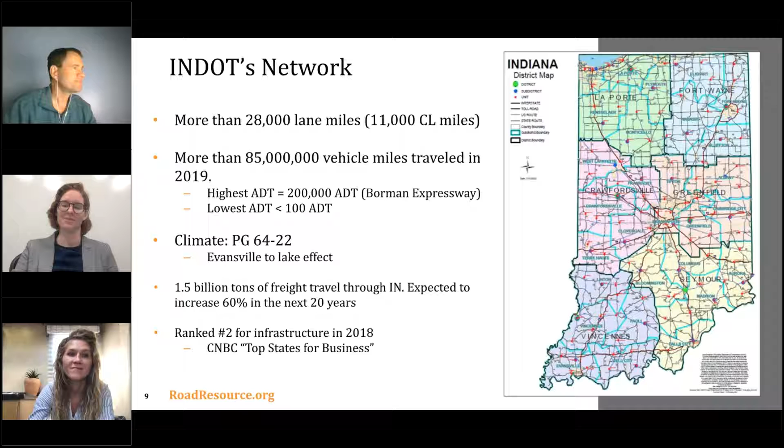So we had to go all the way back to 2005 to make this story make sense. We wanted to tell the story through our Pavement Preservation Initiative and the economic downturn of 2009. But in order to really tell that story, we had to go back to 2005, where we had no formal preservation program at all. In fact, 2004-05 was when pavement preservation as a term was just becoming popular. You had the National Center for Pavement Preservation, I think, formed around that time.

Our budget was $300 million a year for pavements, probably a little bit less than that. As far as resurfacing goes, that budget was evenly split between our 6 districts, so we had no concept of asset management. We were just splitting the money 6 ways and saying, have at it. And so depending on the needs, some districts were getting more money than what they needed and some were starving.

So why did I say we had to go back to 2005? Well, several things happened in 2005 to set the stage. One of them was we had an administration change, and one of the first things we did was we leased our toll roads. The Indiana toll road is I-80 along the north side of the state. We were able to lease that for $4 billion up front, and we used that money to fund a 10-year predominantly expansion program where we were adding lanes, building a new interstate, and upgrading roads to freeway standards.

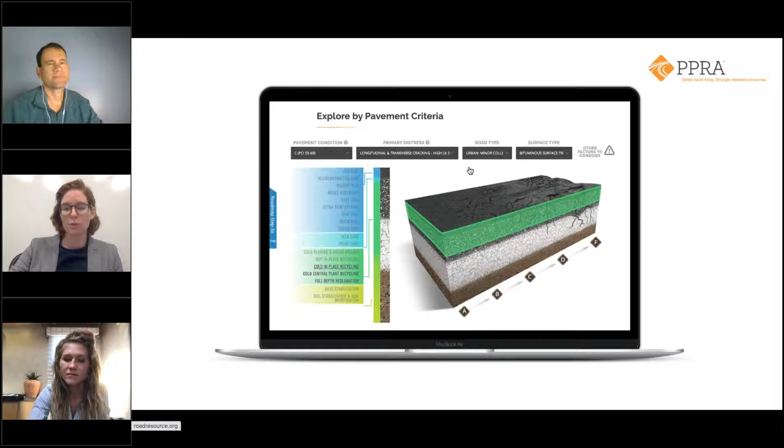What we've built at roadresource.org is a tool to equip you to do just exactly that. Now, none of these are formal recommendations. Obviously, as Lindsay and Todd just said, nothing can replace having experts there on the roads assessing what's going on and making formal recommendations. But this is a really great way to get ramped up and to understand what cards are on the table that we can play.

So just to frame this up, roadresource.org is a completely free website for anybody who has internet, and it's designed to equip local agencies, city, county, and leans on a lot of the DOT specs and DOT recommendations that Todd's going through. The site is divided into different categories or sections of information. And right now we're living right here at this treatment toolbox level. We're talking about different treatments, assessing what treatments are right on what road, and making some of those decisions.

Later on in the presentation, we'll get into the more network-minded decision-making tools, and we'll equip you with some of the calculators there. And then, of course, we have different sections on pavement preservation, recycling, and emulsions, with the understanding that in order to be confident to apply new treatments, you have to really understand them.

So Todd went through some of the hurdles. One of the biggest ones he said was truly being able to assess right treatment, right road, and right time. We've built out a couple of tools that give you a sense of possibilities to solve your road problems. The first of which is this idea of exploring by pavement criteria.

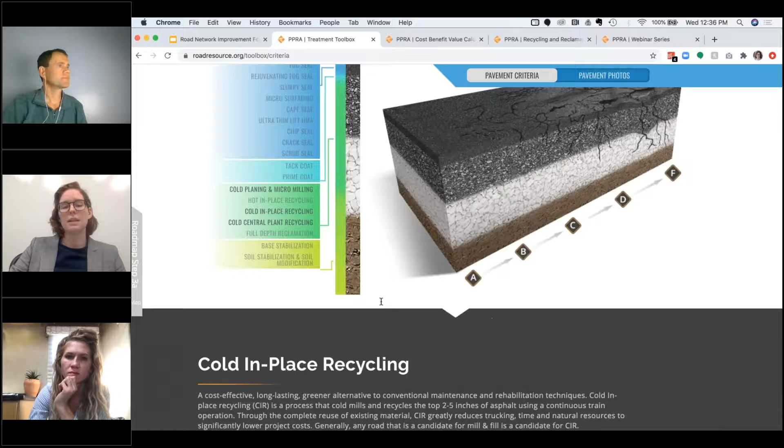And then, of course, if I wanted to learn more, all I have to do is click the name of the treatment, learn a little bit about it, and get some high-level insight about what this treatment can save me as far as time and cost savings, environmental savings, and then I have the ability to click to learn more. So this idea of assessing what treatment is right for your road obviously can be a complex decision-making process, but this can really help you have a starting place or a jumping off point.

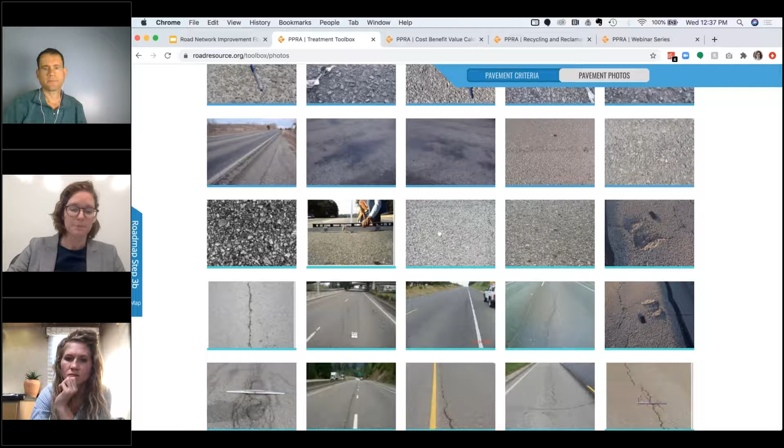For many people, you may not know the pavement condition or primary distress affecting your road. We've developed a tool here that allows you to explore by photos, which you can access this way, or from the main menu, explore by pavement photos. It's the same basic principle. You can scroll through a gallery of roads exhibiting different distresses, pavement criteria or pavement condition ranging from top to bottom of the curve.

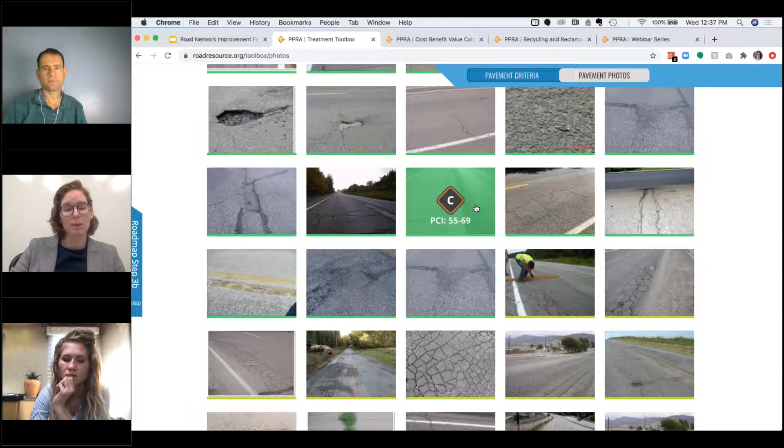And you select a road that looks like yours. You could say, okay, well, my road kind of looks like this. It gives you an example of what the primary distress you're seeing in this photo is, some possible solutions, and even describes some secondary distresses that you might be seeing, and allows you to click to learn more in the Treatment Resource Center about each treatment.

In the Treatment Resource Center, right here, underneath the main menu, Treatment Toolbox, Treatment Resource Center, is a main menu of 18 different treatments organized by surface treatment, pre-treatment, recycling, and base treatments, which has given a consistent menu to each of these. So if you're curious about a new treatment or learning about it, one of the hurdles that we knew we didn't want agencies to have to face was to flip through old printed manuals, some of which might seem out of date. This is an ever updating resource for you.

So we'll just take a look real quick at the cold in-place recycling Treatment Resource Center. Again, this idea of equipping you with the information you need to be confident in exploring a new treatment is critical for the success of these different pavement programs that Todd's going to speak about. The TRC has everything from an overview to process and variations, gives you a sense of different ways the treatment can be applied, different equipment and machines. You can get a sense of your expectation on, well, what can I expect from this treatment if I apply it on a road with average performance versus optimum performance.

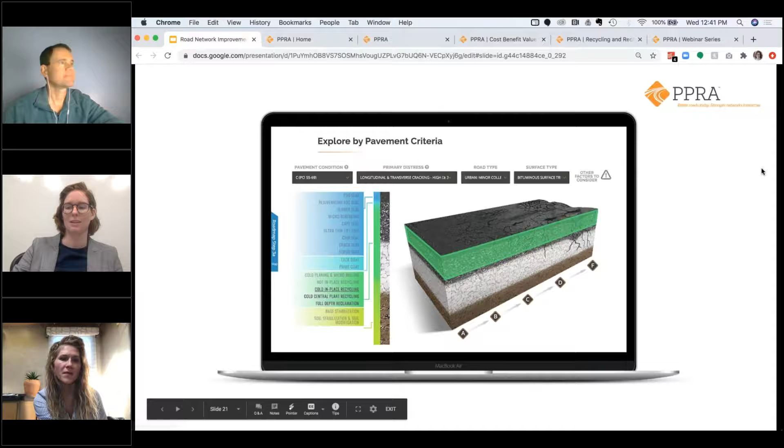So Todd, we'll come back to you and ask you to talk a little bit about prioritizing projects. And you have had a couple of questions pop up in the chat where people are wondering, do you do that mostly through life cycle cost? Or how do you actually prioritize? So I think you're going to speak to some of those questions, but let's turn it back over to you.

I will speak to some of those, but that's a really good question. When we started out trying to identify these treatments, we were looking at life cycle costs up front to see which treatments make sense, or at what point they make sense. So for example, FDR is not the right treatment on every road, right? So we're actually going to show an example here that's a great one, where the expensive part of fixing pavements is patching. And the more patching you have, the more expensive the job gets.

Well, as you go to things like FDR, you eliminate the need for patching. So if you can imagine your curves intersecting, you reach a point where it makes more sense to do an FDR, for example. And you can do that same type of analysis for pretty much every treatment. Thank you.

So tell us a little bit more about your kind of standard project prioritization. Yes, so this is going to get into need to differentiate. So when I mentioned early on about how we would split the money 6 ways for the district pavement program, that's what I'm going to talk about now. How do we split the money as we shift completely, or hopefully more, into asset management mode and not just divide the money up and do your best.

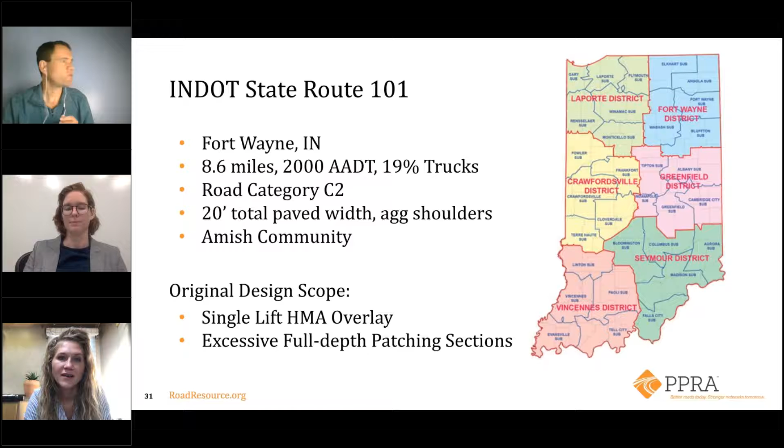Anyway, yeah, an example of a cold in place recycled job, and it kind of ties back into the last question. We had a road, a C2 category road, in really poor condition. It was originally in the program for a single lift HMA overlay, and when they got out to looking at it, it was going to require so much patching, so much widening that wasn't the answer. So we can move on to the next slide. I can show you some of the distresses this road was exhibiting.

This is just from a surface standpoint. So 31% of the road was in poor condition, with the average being 153, which is getting close to poor. It was 20 foot of pavement, which for a state highway is very narrow. This road's in Amish country, so there's lots of Amish buggies, and it's very unsafe to try to pass Amish buggies on 20 foot of roadway because they can't get off because there was no shoulder.

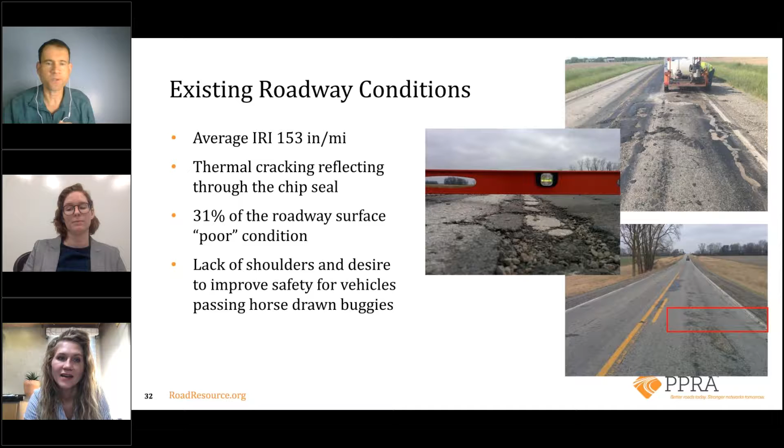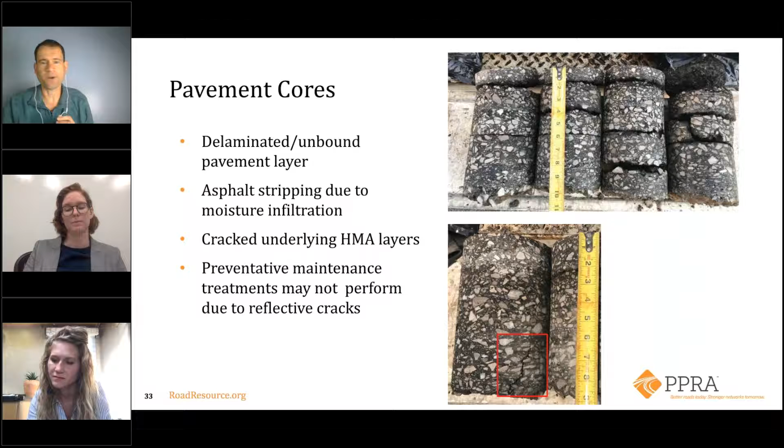The other thing we saw on some of these cores, and that's the bottom one in the red box, if you can see, you've got a crack from the bottom of the core coming up. That's called bottom up cracking, and that's an indicator of structural distress, which means this road had just had it. You know, there was no preserving it. We can move on, Grace, thank you.

So we were looking for something. By the book, this would be a reconstruction, but do we really want to reconstruct a road like that if there's a better way? So we got to looking at cold in place. So we developed a spec for cold in place, but we wanted to have a good opportunity to use it, and this was one. Oh, sorry, that's next slides. So yeah, this is where we looked at doing a cold in place recycle, and then Grace, you can go through your calculation. Thanks, yeah. For the sake of time, I will show you an example of this.

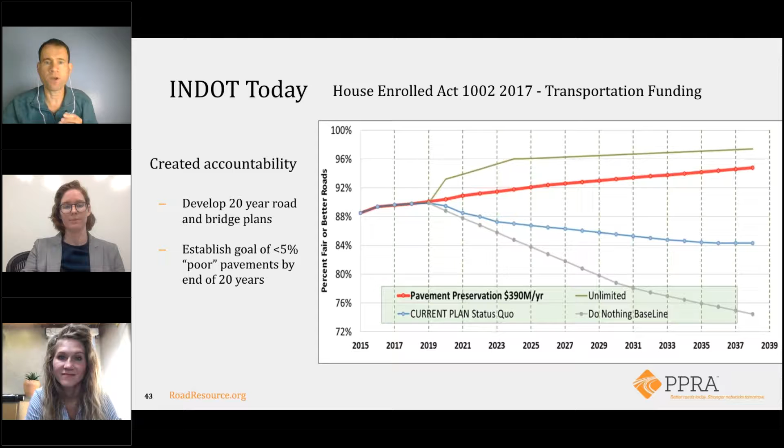You're going to meet the goals that we set for you, which is 5% poor at the end of this 20-year period. So remember, we were at 10 or so % poor. So that's a pretty substantial reduction in our poor miles. But we're projecting with our modeling that we can get there with that increased funding.

Okay, last kind of question for you, Todd. We're in the middle of COVID-19. We saw in the beginning many agencies uncertain about funding next year, and we're looking at decreased funding. What would you tell local agencies or other DOTs who are on the line that they should be doing today? So take care of what you have would be the first thing. Don't try to chase the worst first, because you're just going to drain your money. If you take care of what you have, you're going to set yourself up for success in the future.

Go slow. So like I mentioned earlier, get good at a few treatments, get familiar with them, know where they work. Don't try to do everything at once, because you're probably going to end up with a lot of things that don't go the way you want. So get good at it.

At this point, we're not projecting much revenue shortfall because of COVID, but there's just a lot of uncertainty. We're seeing traffic levels. They were definitely down March, April, May. They've kind of come back to almost pre-pandemic levels, which means our fuel tax is roughly where it was. Okay.